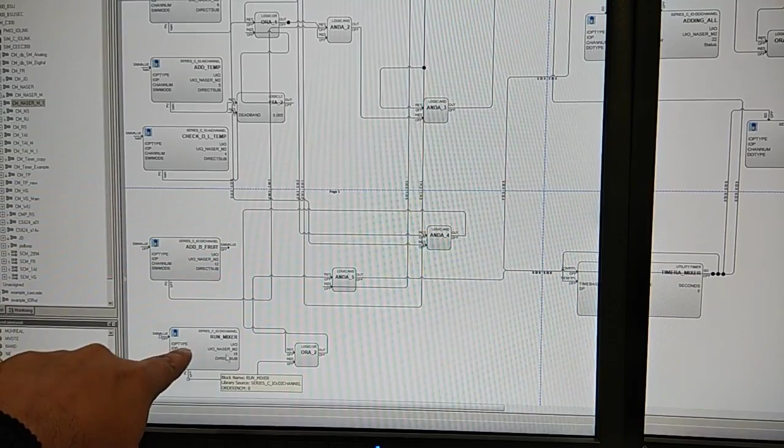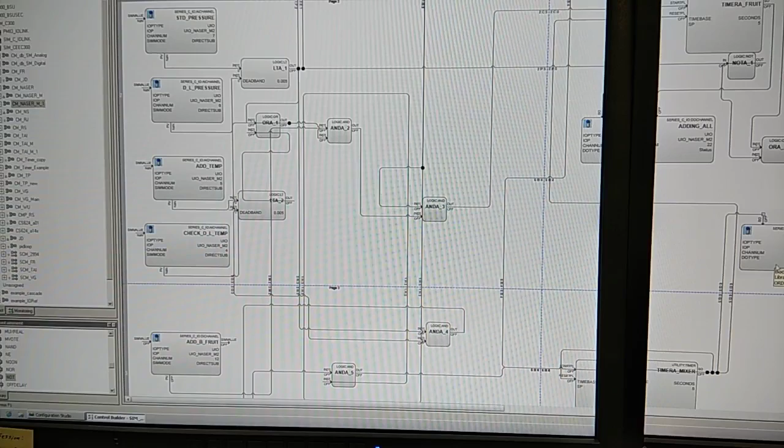After running the mixer, I get the final collection here. This is the outtake pump. So after all that, the final step is here, and my emergency condition unit is there.

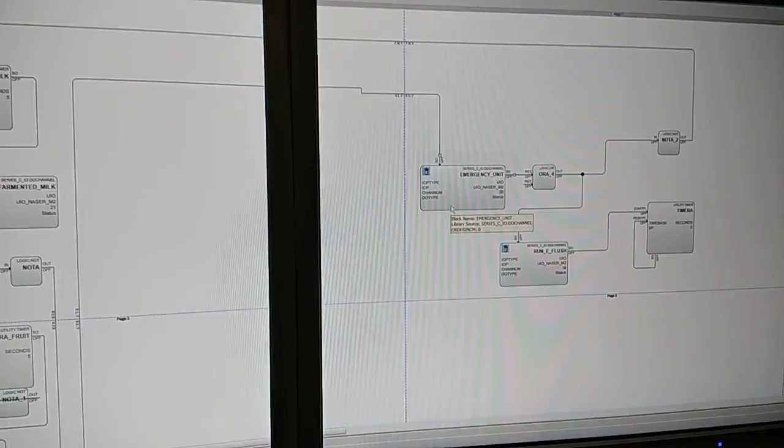Here is my emergency unit. So when anything happens, suppose there's an abnormal condition, the emergency unit will immediately run an emergency flush for 5 seconds, and it also informs the run process to shut off, stopping the run process.

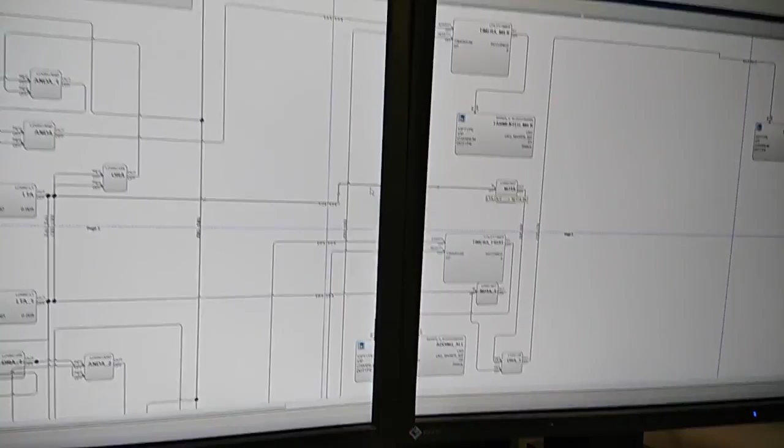Here are the emergency conditions, the alarm conditions. If temperature is greater than my set temperature, then the emergency will happen and the emergency unit will notify this. Or if temperature is very high compared to our set temperature, emergency will also happen. If either of these two alarming conditions is true, it goes to the emergency unit, and the emergency unit takes immediate action.

So again, this is my run process, and these are my inputs and sensors: temperature sensor, pressure sensor, and this is my output.

So now I loaded it to the monitoring site, and I will run it and show how it works.

Okay, I need to set all of the things. Here my system is running. You can see that my system is running.

Here I have set the critical temperature to 101, and my given temperature is 75, so it is working fine, and there is no emergency condition here, so the run process is on.

If something happens, I mean the temperature or pressure is higher than the critical temperature or pressure, then it will be off, and set the run process off.

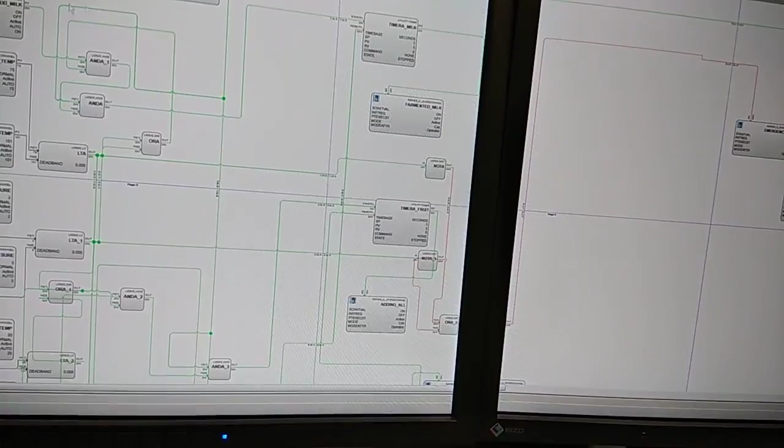So this is the first step. After adding milk, this timer runs for 5 seconds, and after that this timer runs, and finally this timer will run. Okay, so that's how my control application is working.

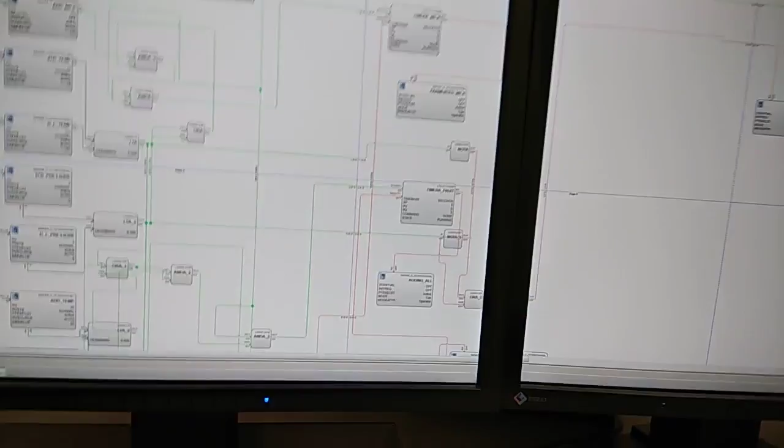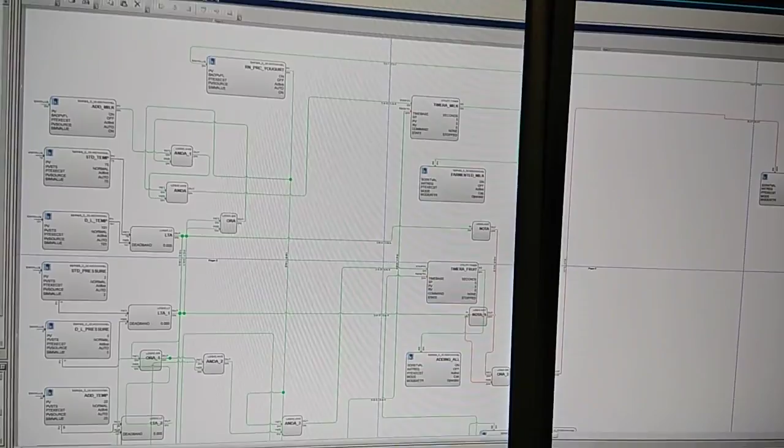For future work, I need to think about more vulnerabilities of the system and my control process, add more features to securely control it, and think about more safety issues. Thank you so much.